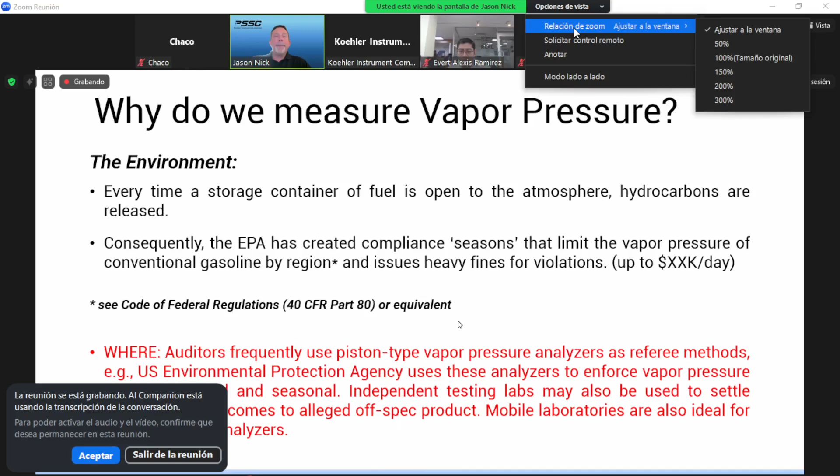In South America, there are a number of mobile laboratory applications for vapor pressure. So that's where I would go to look for any environmental protection type opportunities.

Safety and asset protection. So it's probably one of the most important ones as far as moving fuel from place to place, right? So anytime we're transporting crude oil or fuel, that infrastructure, that equipment is designed or specified to work with vapor pressure or fluids with a limit of vapor pressure, right? So that means massive pumps on pipelines. If vapor pressure is too high, cavitation occurs, which can actually cause the pumps to violently explode. This is a serious condition, okay?

Maritime vessels, you can imagine a ship full of crude oil, floating in the sun. That sample's going to heat up and expand. That could result in a hull breach. A sunk or damaged floating roof tank on any storage tank is very bad, as well as rail car explosions. We've had a number of incidents with that here in North America. Pipeline damage, and the worst thing of all, of course, loss of life. So very, very important when it comes to logistics of crude oil and its refined products.

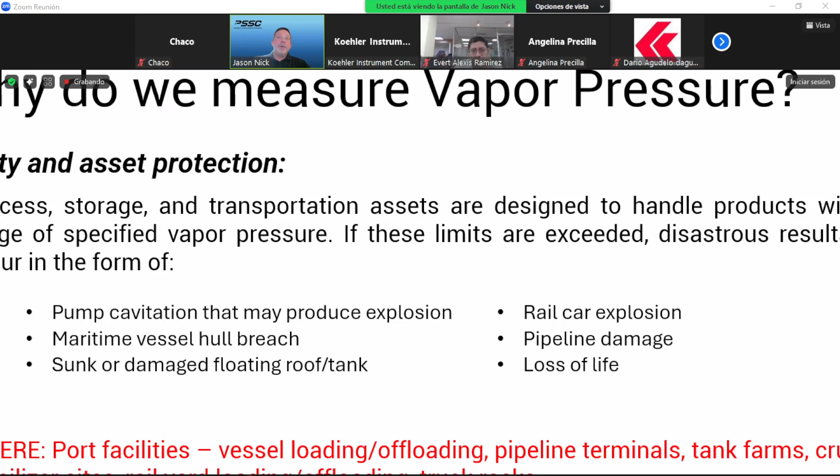Where to look for these opportunities? Well, that's, again, kind of simple. But port facilities, anytime vessels are being loaded or offloaded, pipeline terminals, tank farms, crude oil stabilizer sites. So this is where you'll see crude oil or condensate coming out of the ground and being stabilized or have the vapor pressure brought down to a limit that's safe to transport in today's oil and gas infrastructure. So yeah, rail yard loading for trains and also truck racks for soft shell carriers, over-the-road trucks.

Profitability. So this is a big one. And really this comes into the midstream sector. And really what's happening is the producers or people that are trading crude oil or fuels are often trying to reduce what we call the giveaway. Okay, so the giveaway is the pressure difference between the product's vapor pressure and the limit that's set by the authoritative bodies, right? So for example, if you have a 100 kPa fuel and the limit's 110 kPa, then you have a 10 kPa giveaway.

That means that you could have injected or blended lighter components into that fuel to expand it, right? And you're essentially selling that cheaper product, usually in the form of butane. You're selling that as gasoline. So it happens both on the crude oil side and for gasoline. So in crude oil, butane could be kind of snuck into the recipe as a diluent or an extraction solvent, but really what they're trying to do is to expand the volume of crude oil that they're selling. Okay, same thing with gasoline.

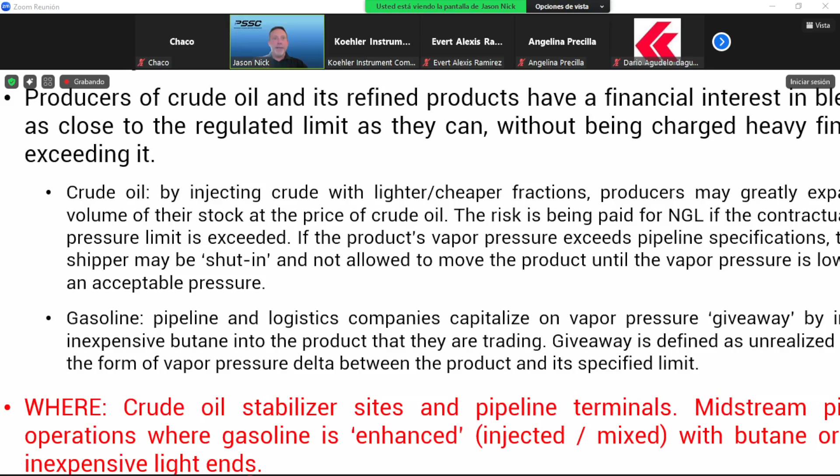And also midstream pipeline operations where gasoline is enhanced, again, with a static mixer or possibly through pumps or something like this, but they're typically going to use butane or other inexpensive light ends. So that's where you would go to look for the enhancement opportunities, is at the midstream level.

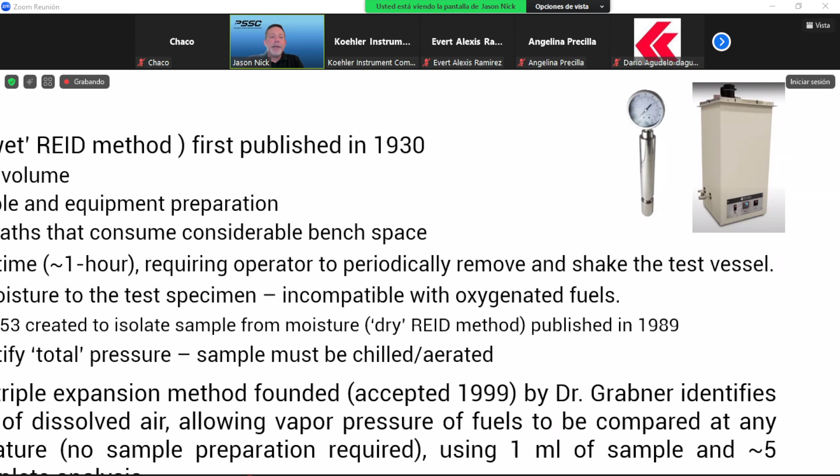Okay, and I'm just going to close this section with just a brief history on vapor pressure. So really it all started in 1930, okay? And this is a very, very old method, ASTM D323. It's still around. From what I understand, a lot of countries still use it, not just for crude oil, but also for gasoline certification. Takes a very long time, and I have to be careful, I know, because you sell this equipment for Koehler, but large sample volume, we've covered that, right?

Lengthy sample and equipment preparation. You all know that you have to disassemble the bomb. You have to clean it thoroughly, right? Before and after really every measurement. And sometimes for even crude oil, these tests can take up to 1 hour, where the operator has to remove the bomb every 2 minutes and shake the test vessel and introduce it back into the bath.

We also have problems with moisture. And of course, moisture and alcohol do not mix well. So when we're talking about oxygenated fuels, it becomes even more frowned upon to be working with a method that uses water, because you're actually immersing the bomb into a water bath, right?

So Dr. Grabner, in the early 90s, came out with D5191, which I'm sure a lot of you have heard of. It's the first mini method, or the piston expansion method, that correlated directly to D323. But building on that, D6378 was a piston type expansion method that negated the need for sample prep. So customers or producers could compare samples from around the world without sample prep.

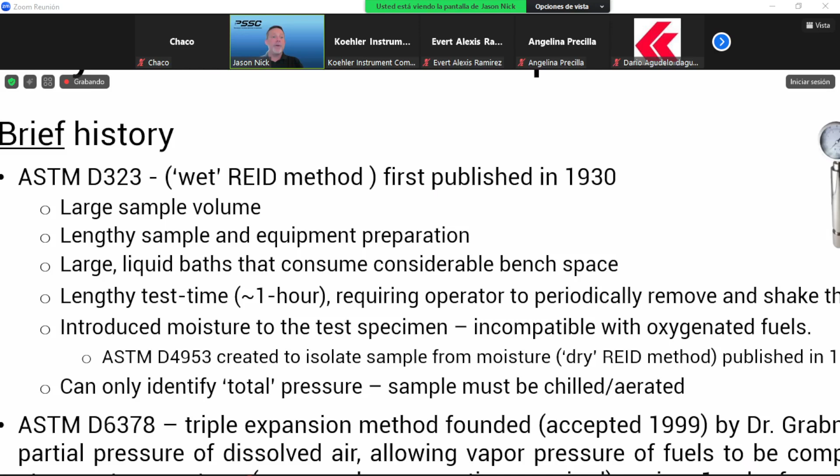Okay, so using only 1 milliliter of sample, about 5 minutes for a complete analysis without any input from the operator. So no shaking or anything. It's all handled internally to the analyzer. Okay. So that was just a little bit on the analyzer, PSSC.

Why did we build this analyzer, and where to look for these opportunities? As you can see, a lot of the opportunities are going to be simple because they're where you're already selling bombs and baths, right? But some of it may not be so obvious. Like I said, when you're in the field at tank farms and truck loading racks, these operations typically are not going to be employing Reid methods, and those are prime targets for the mini methods. Okay.

So now I'm just going to talk a little bit about the launch progress. As I already mentioned, we did a soft launch for this analyzer back in October of '24. And I say soft launch because we wanted to see how a lot of the customers that we already know from doing business with them on the service side would react to this analyzer. And of course, our competitors are there as well. So we didn't make an announcement. We launched it at Gulf Coast Conference, and we entered the analyzer directly into the new product showcase.

Now, we didn't win it. It's hard to win those things, but vapor pressure is vapor pressure. People don't get too excited about it. But we had some key players in the industry that took interest very quickly, mostly from the independent testing laboratories, as well as midstream operations. And we even took some feedback from those customers back with us from this conference and implemented those features on the analyzer. So very well received.

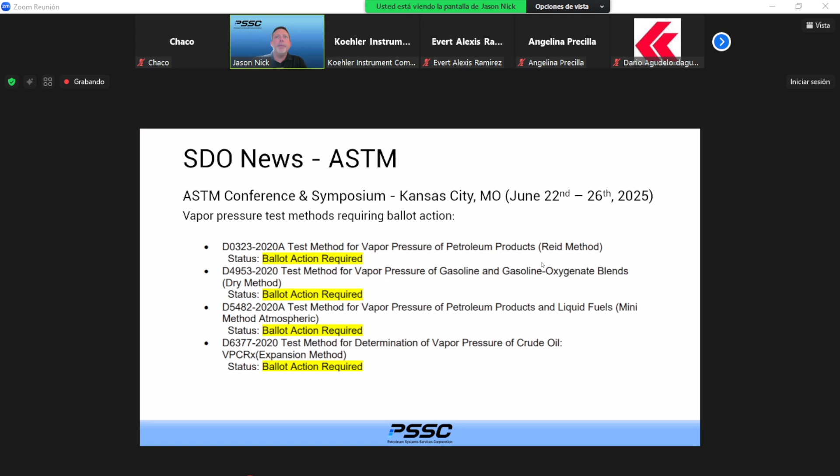But the one that's relevant to us is D6377. That is the expansion method that the RVP Pro performs for crude oil. And we'll talk a little bit about that now. So some of the ongoing business at ASTM does involve 6377. And really, it's about the mixing energy, or what they'll call the agitation rate. And that is how fast the measuring cell with the sample in it shakes back and forth, simulated as if an operator were shaking the bomb.

And why that's important is, if you do not apply enough mixing energy, then you can satisfy the equilibrium criterion before a true equilibrium has been realized. So we're in the process of defining how much mixing speed should be applied to the sample.

So the good news in all of this for us is we've been doing this for several years. I had worked with Eralytics when this topic first came out. So the RVP has plenty of provision for mixing energy in the future, even if we should happen to find more difficult crude oil or heavier crude oil that has a hard time with equilibrium.

So in other words, we have lots of room with increasing our shaking speed, regardless of what becomes of this topic. So we're looking good, is what I'm saying.

On the D5191 method front, what's happening here is the U.S. laboratories are really asking that D6378, meaning the method that does not require sample prep, is recognized as a method that can be used to certify gasoline. And the important part here is actually linking the two methods and getting a note into D5191 that advises the user that they can use D6378.

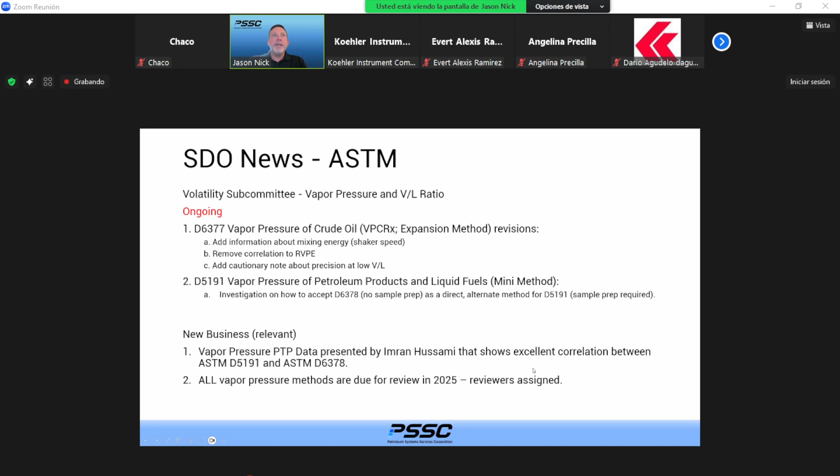So nothing earth-shattering, but just to let you guys know that we are in the mix on development of these standards and shaping them for the future. So there's just a quick update on the ASTM side.

And then the most recent news really is that we had done a webinar with Baytech. So Baytech is a vendor for laboratory information management system software, or LIMS, okay? And that is a software that most large laboratories are going to connect their analyzers to, so that they can get the data and also the statistical quality control analysis from the trends on their analyzers.

Baytech, specifically Josh Burkhalter, he's the Baytech Business Development Manager. We did this RVP Pro edition together, and it yielded about 60 attendees, 10 of which were international, and we actually had 2 competitors that joined us as well.